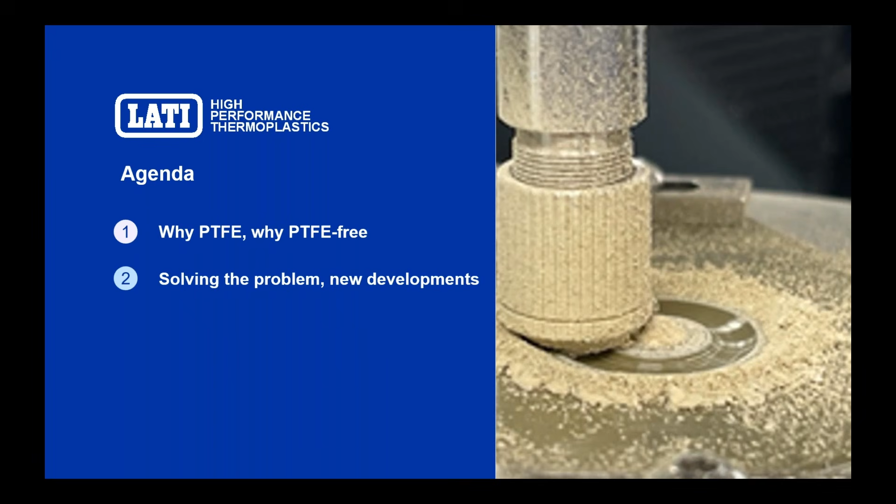So let's first give a look at the agenda. We will start to understand why PTFE is so effective from a tribological point of view in thermoplastic compounds, starting from the chemical structure of PTFE, which is the key under the outstanding performances. Then we will see how it is possible to approach a replacement problem like this one, how it is possible to take reference to select the correct device in order to understand and test the tribological properties. Then for sure we will give a look at the real tests, the real results, and at the end we will make some conclusions and give some tips in order to go on with other tests and explore maybe other solutions.

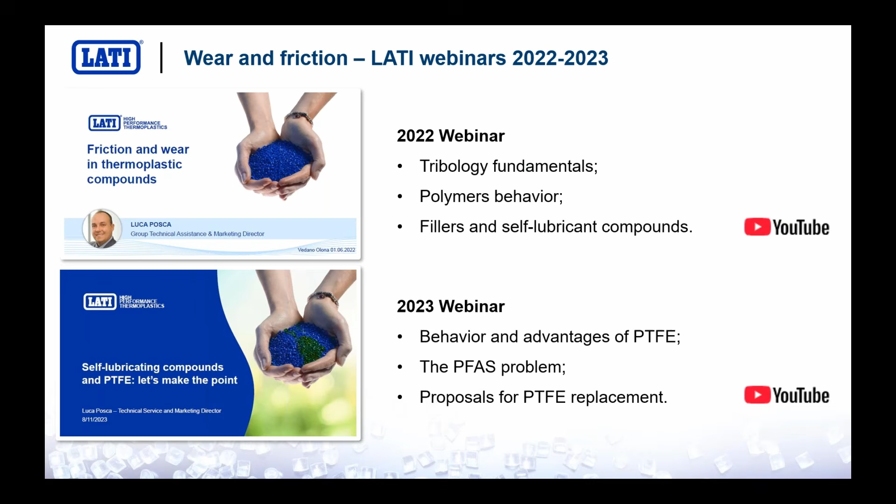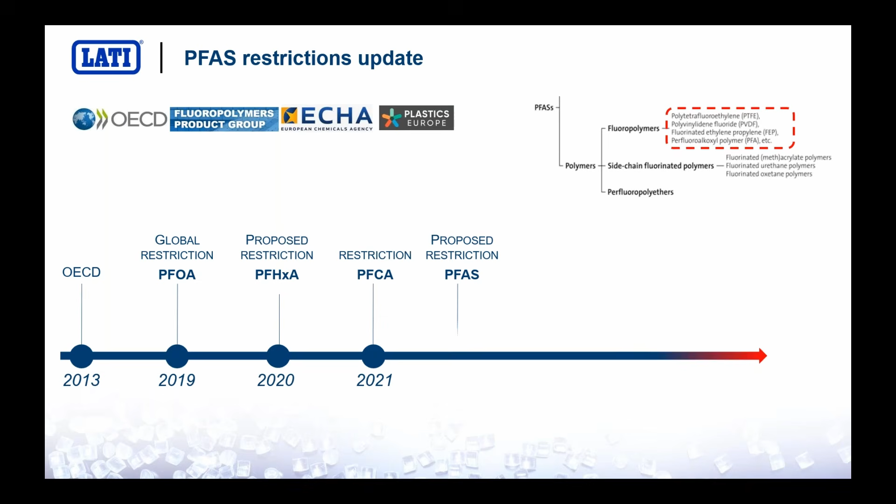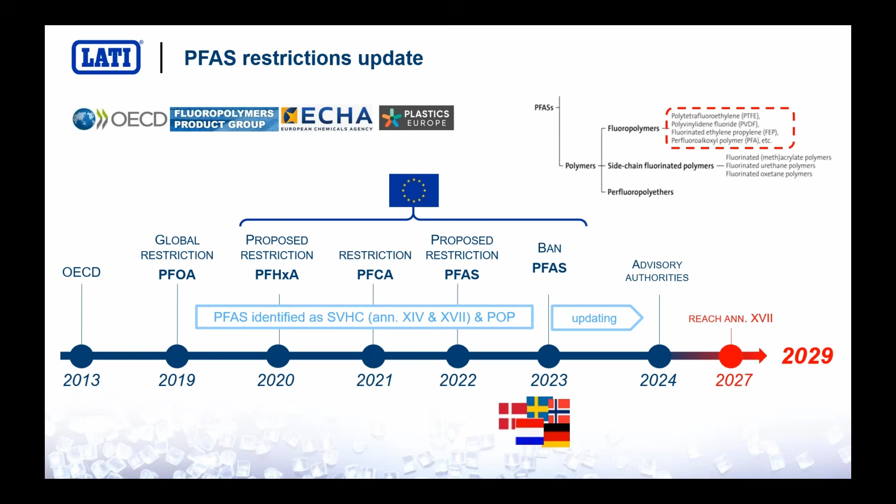As you know, this is the point. The problem is that possible restriction could take place in the next few years due to the fact that all the PFAS substances like PTFE are considered toxic for the human body, but also for the environment. They have a high bio and eco accumulation, and so they are considered dangerous for both the body and the environment. Now the European Commission is making some new evaluation, also thanks to new studies he asked, but also with the help of external entities. Rumors say that probably some restriction can take place, but not before 2029. In any case, we are waiting for an official answer by the European Commission.

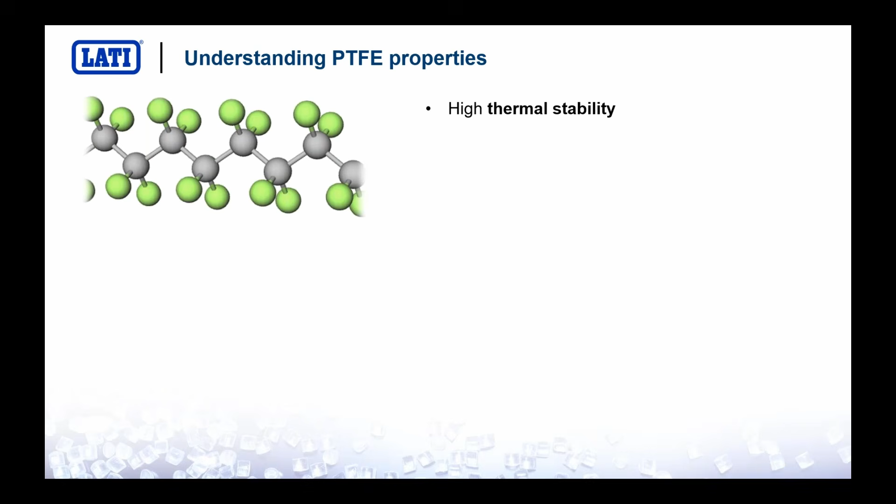Let's give a look, as I've already mentioned, at this outstanding substance, PTFE. What is the secret of PTFE? The secret of PTFE is the chemical structure. The macromolecule of PTFE, the polymeric chains, are really, really long. The molecular weight is really, really high, even if the molecule itself is really simple - only two different elements in the chain, only carbon in the main chain and fluorine in the side groups. The secret is the covalent bond between carbon and fluorine, which is probably one of the strongest bonds available in nature, due to the big difference in terms of electronegativity of these two elements. A very strong bond means that you need a lot of energy to break it. That's the reason why PTFE shows a very, very high thermal stability.

The melting point of PTFE is over 300 degrees. The chemical inertia is also very high - it's very inert and resistant against, for example, strong acids or strong bases, strong oxidants. So it's widely used also alone, not like an additive, but also as a base resin in very aggressive environments. It also exhibits a very low surface energy - it doesn't like to adhere to any other substances, so it's very difficult, for example, to paint it or to glue it. This is very important because due to the fact that it doesn't like to adhere to a counterpart, it shows a very low friction factor in relative movement against another part, for example metal or another plastic part. For the same reason, it exhibits a very high resistance to the adhesive component of wear. On the other hand, the forces between these big chains, the intermolecular forces, are really weak.

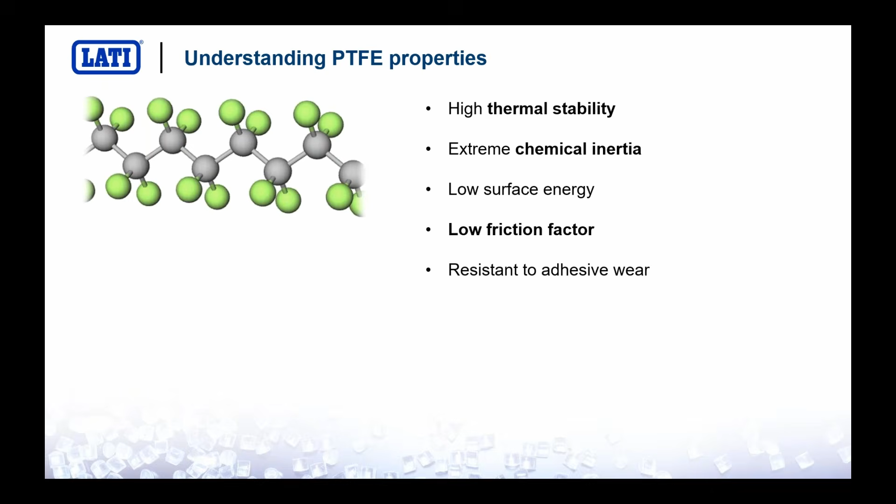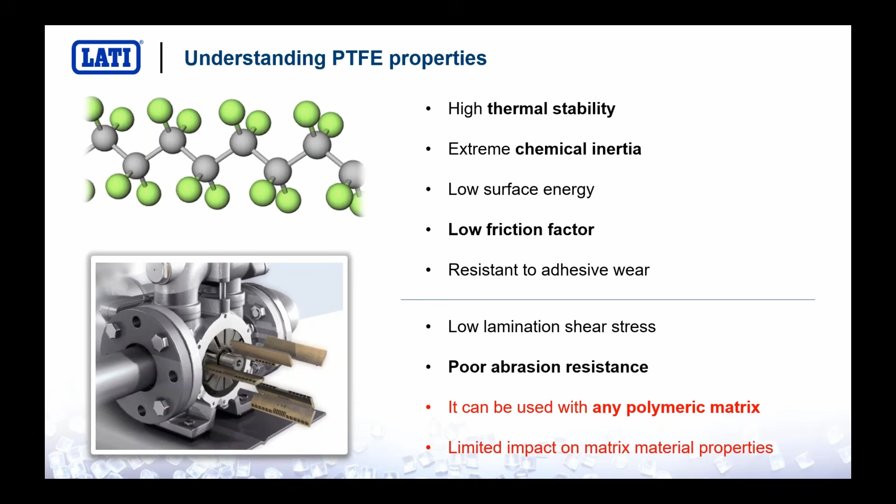There are many solutions to improve it. For example, a solution with the synergistic effect between PTFE and aramid fiber - that's just an example. Other properties include that it can be used with any polymeric matrix, from polypropylene to PEEK, polyamide, PPS, and so on, without compromising a lot the mechanical and also the thermal properties of the main resin.

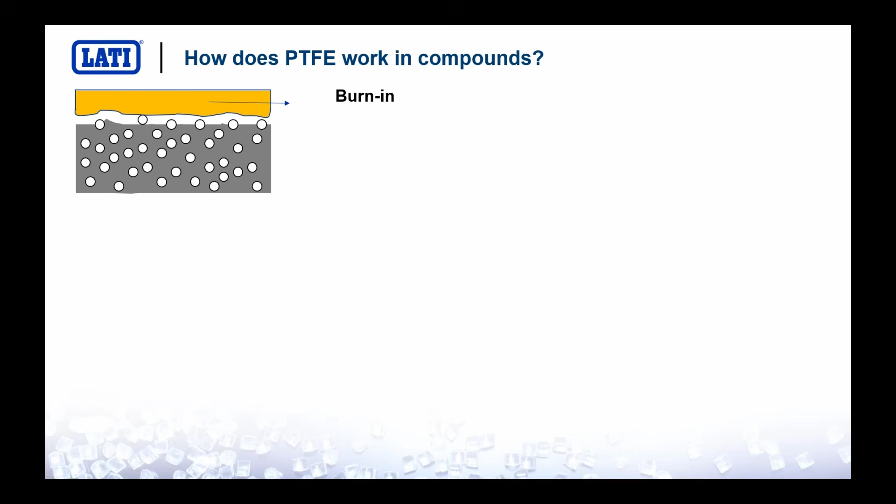But what is the mechanism at the basis of the outstanding tribological performances? Just imagine a compound, a base resin, the gray material, with the PTFE, the white bubbles, dispersed inside the matrix, and the relative movement against a metal, for example the part in orange.

The first step is a burn-in step. So any kind of surfaces are not flat - they have peaks and they have valleys. Through the relative movement of one surface against the other, we have the removal of the surface roughness for sure.

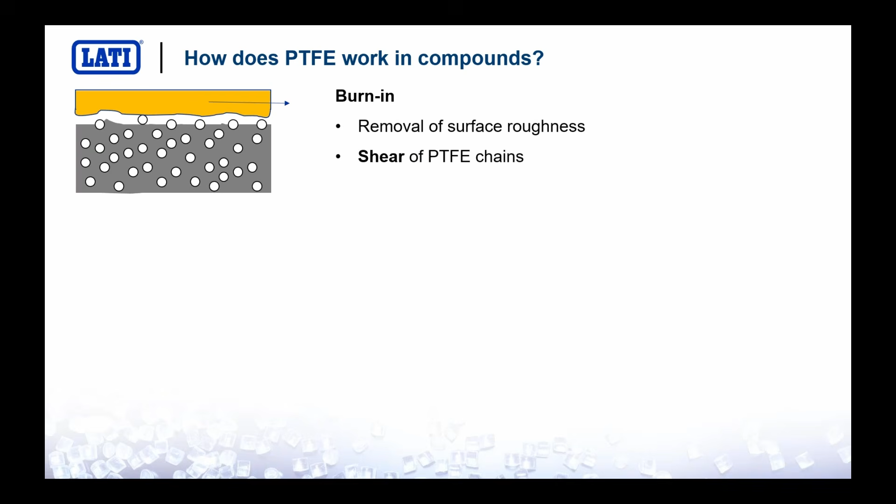Due to the very low intermolecular forces, during this movement, it's very easy to shear the PTFE chains, which fill the roughness, the valleys of this kind of surface. Let's make a zoom on one of these valleys filled by PTFE, and you can see there are the white bubbles with PTFE inside.

The second step is the breakage of these very long PTFE molecules into several smaller molecules, smaller chains. So the chain breakage, which leads to the formation of very, very reactive molecules, very reactive radicals.

These radicals are then transferred onto the counterpart, so there is a film transmission to the counterpart. At the end, we will have PTFE on one, but also on the other surfaces of both materials. So we have PTFE sliding against PTFE.

PTFE works in a very good way, above all for high load and with low speed. And the typical percentage we normally have PTFE in the compounds goes from 5 to 20%.

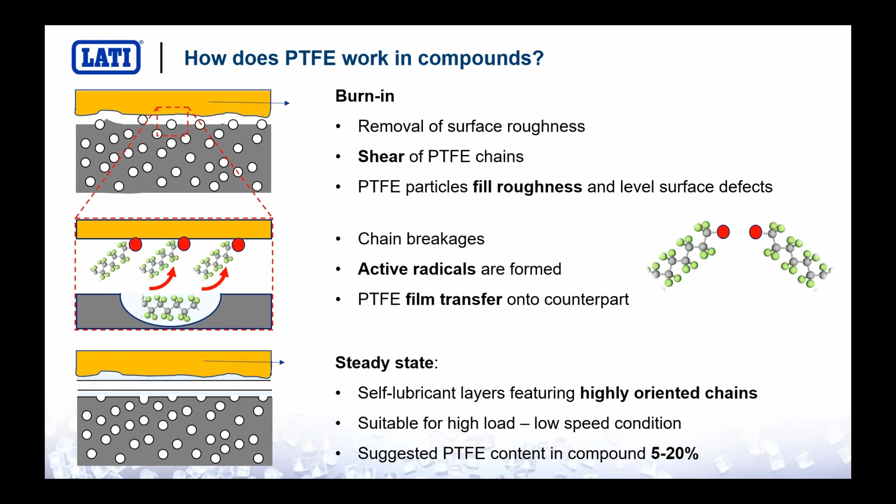So the secret is this film transmission that we try to obtain also with other polymers, as we can see in the next few slides, to take advantage from it.

So to be a good alternative of PTFE, what are the main requirements? For sure, high chemical inertia, in order to not lower the chemical inertia of the base polymer. Thermal stability, for sure. Good processability, because it's important to guarantee a good process, a good moldability of the final compounds with good viscoelastic properties. Not compromise too much the mechanical properties, for sure, at the end, but probably the most important thing, with an eye to the price.

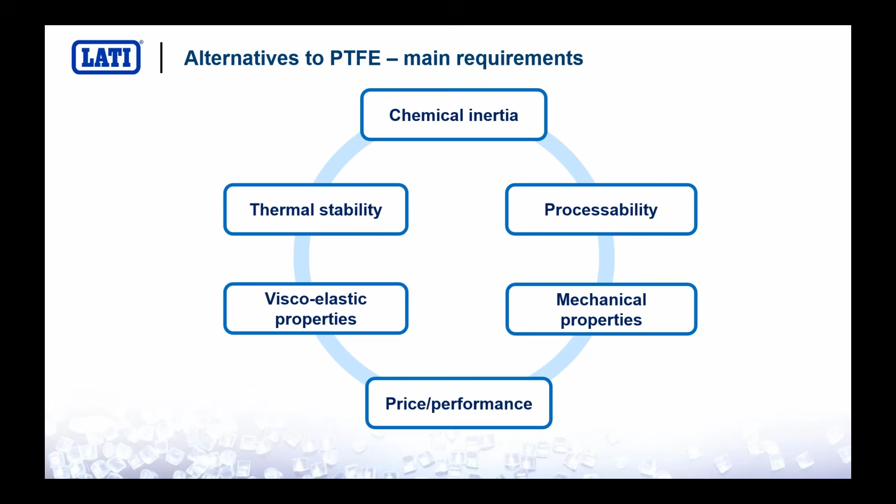As we already know, one possible solution already used in the market is a polyolefin, a very strange polyolefin - the name is ultra-high molecular weight polyethylene. So it is a high molecular weight polyethylene, a polyolefin. This is the chemical structure. Also in this case, the molecular weight is really high, like also the crystallinity, but the molecule itself is really simple, only 2 elements in the polymeric chain.

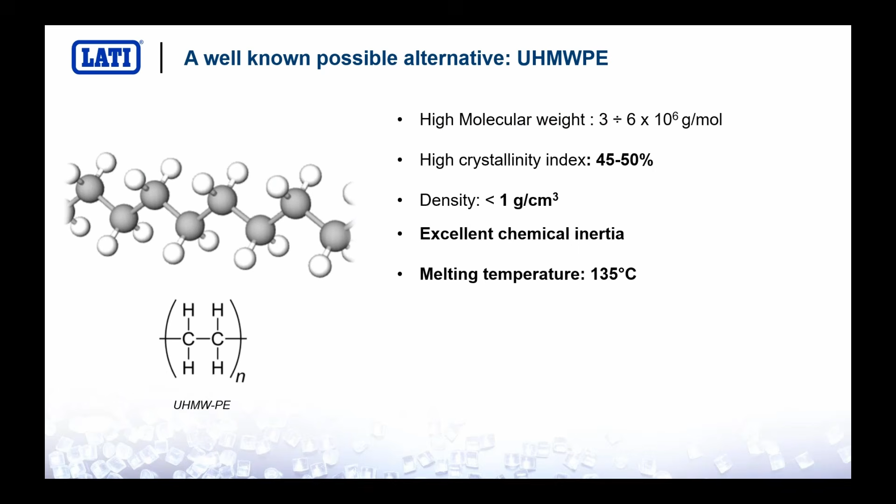The density is lower compared to PTFE, which is higher than 2. In this case it's lower than 1, so very low compared to PTFE, with an excellent chemical inertia, like all the polyolefins, polypropylene, polyethylene, and so on. A low melting temperature, around 135 degrees, so 200 degrees lower than PTFE. But another advantage is also the GWP, the carbon dioxide emission to produce 1 kilogram equivalent of the product, which is really lower compared to PTFE.

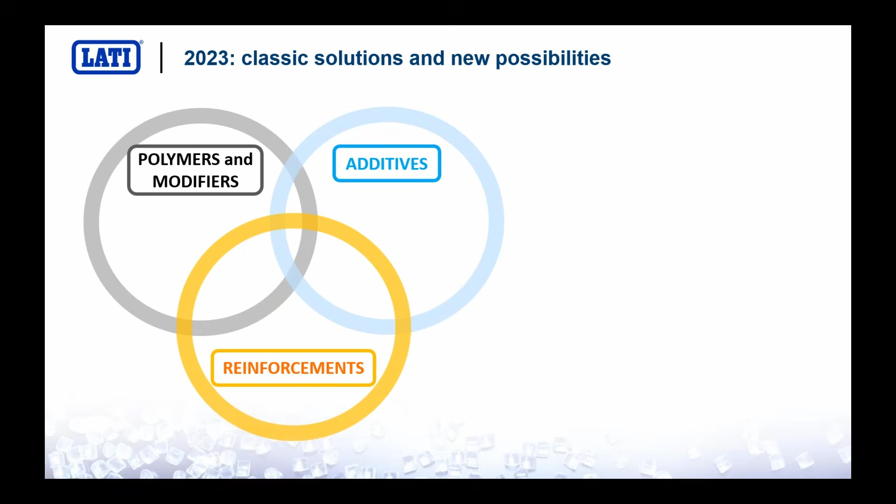Up to now, what we have already done, and also our competitors did, is analyze the tribological behavior of the base polymers with some modifiers, elastomers, and so on, with the existing self-lubricant additives in the market. And also we know the behavior adding some reinforcement, some fillers or fibers like glass fibers and also carbon fibers.

We know very well also the synergic effect of different self-lubricant additives available in the market, like silicone oil, aramid fiber, molybdenum bisulfide, graphite. But for one reason or another, they cannot be considered equivalent to PTFE, because they can work with some boundary conditions, but not in any kind of condition like the PTFE applications.

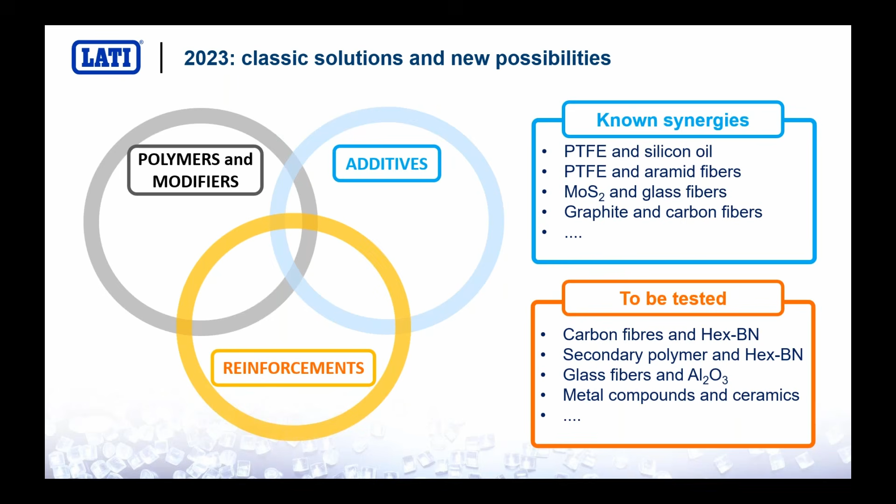So what we need to do is explore something else - try to find other additives, try to find some mineral fillers to add to replace PTFE, but also explore the synergist world. And that's what we did.

We performed this job thanks also to Politecnico of Milan, a university based in Milan. This study is also a thesis of a student who graduated two weeks ago. This collaboration gives us also the opportunity to have access to many topics in the literature, many books and so on. It was a very good collaboration which helps each other.

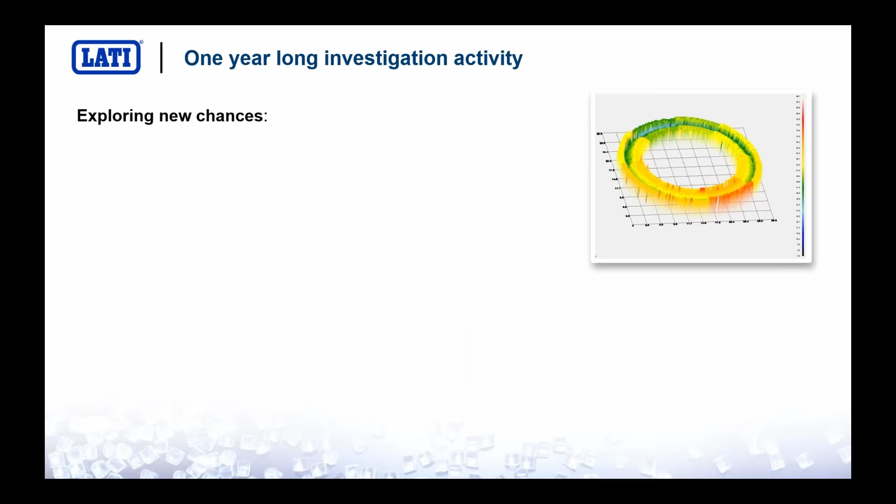So let's make the point in order to understand how is it possible to approach this kind of problem. First, we performed literature studies, thanks to the university and to the help of our suppliers, in order to find some suitable or possible candidates like main fillers, but also synergists.

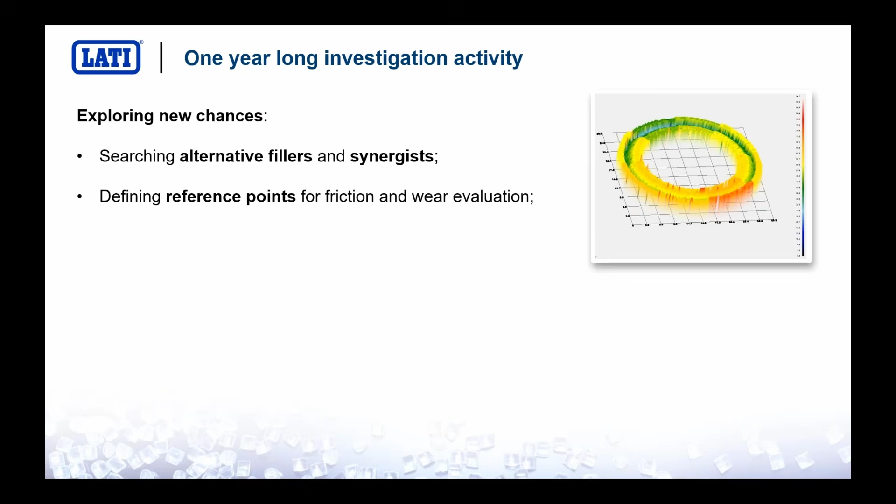Then we had to define some reference points to evaluate friction and wear, so some materials which are the reference to start. Then we had to define, and it lasted a lot of time, the most suitable conditions. As you can see in the next few slides, there are many conditions and parameters possible to set in a tribological device to define the most suitable method to detect the wear resistance, the wear factor, but also the friction coefficient.

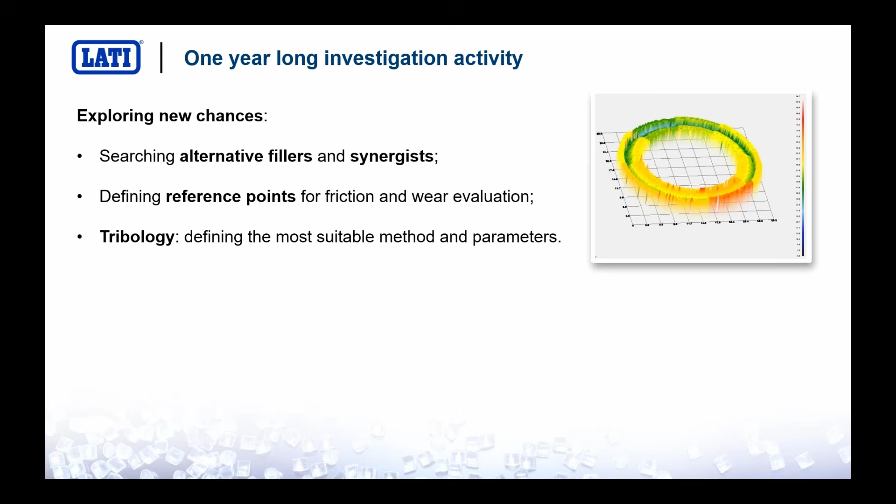At the end of these studies, we had to analyze all the other properties of the compounds that we produced: mechanical, thermal properties, and also the processability and the reliability. It means the industrialization of this kind of material, in order to understand if it's possible also to push them.

With an eye, as already mentioned, on the price and the marketability of this new proposal.

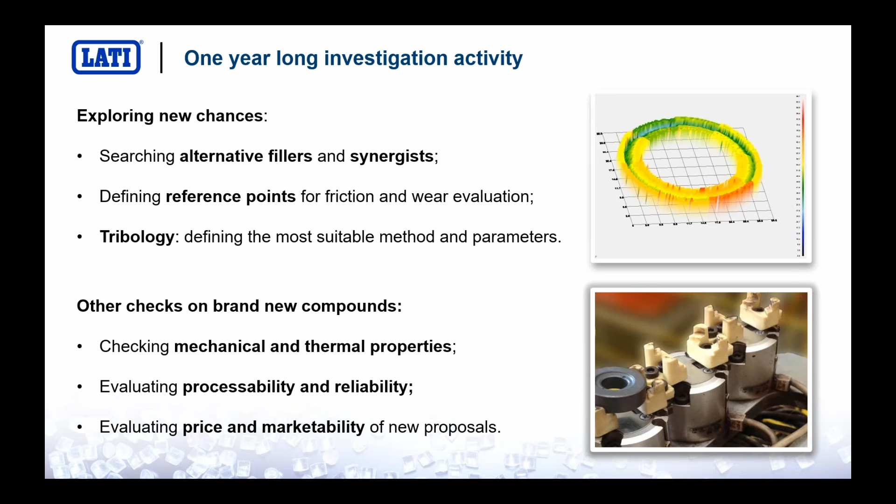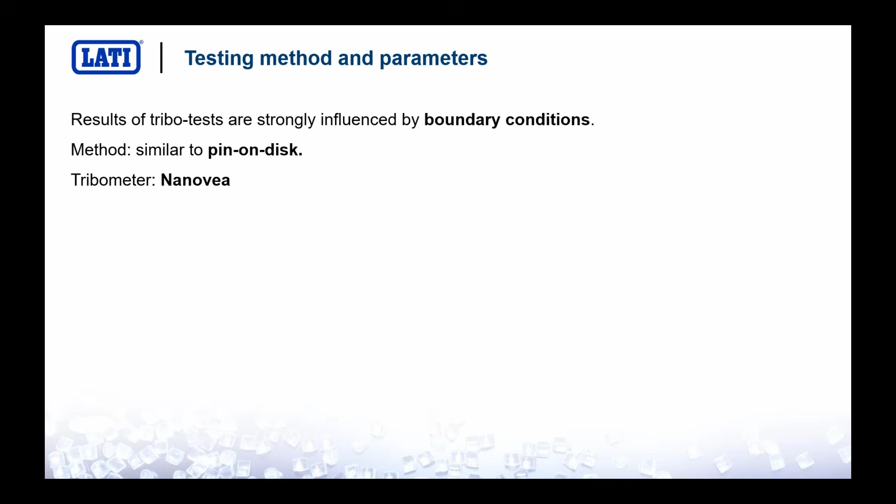So for what concerns the test, there are many kinds of devices available in the market to measure the wear resistance, but also the friction coefficient of polymers. We selected a pin-on-disc method. The tribometer is made by Nanovea, and the pin is made in stainless steel, while the disc is made of plastics, the compounds that we want to analyze, and is put in rotation against the pin.

As you can see in this slide, there are many parameters that we can calibrate, but the most important ones are the rotational speed, 100 RPM, and also the load, which is 10 Newton. It's also important to notice that we put blown air on the wear site in order to remove all the particles that were created during the test.

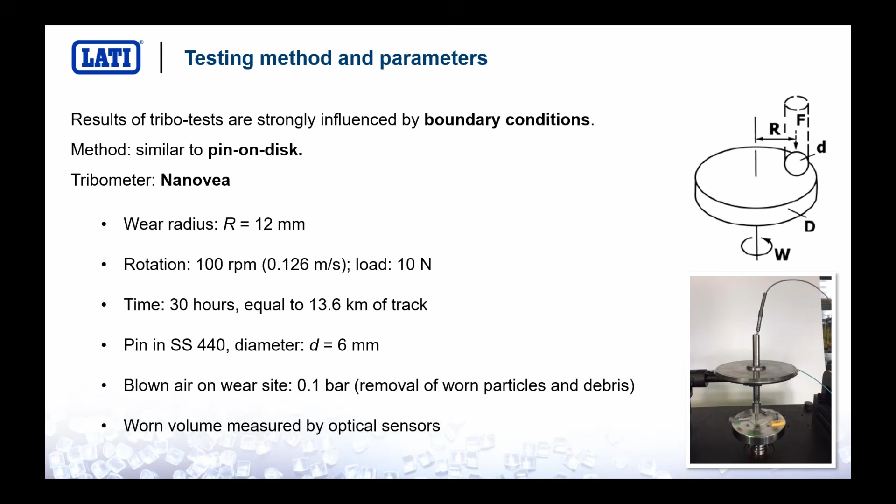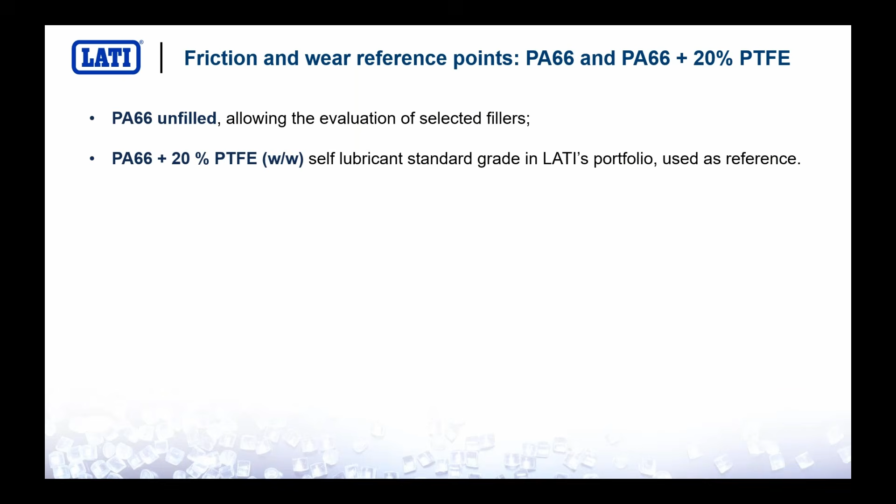For what concerns the reference, we started with a material that for LATI is a standard material, the polyamide 66. So we started to evaluate the performances of an unfilled polyamide 66 in order to fix a reference. And then for sure we selected also a polyamide 66 plus 20% of PTFE, because the aim of this study was to replace it with other candidates. So we used these two materials as reference.

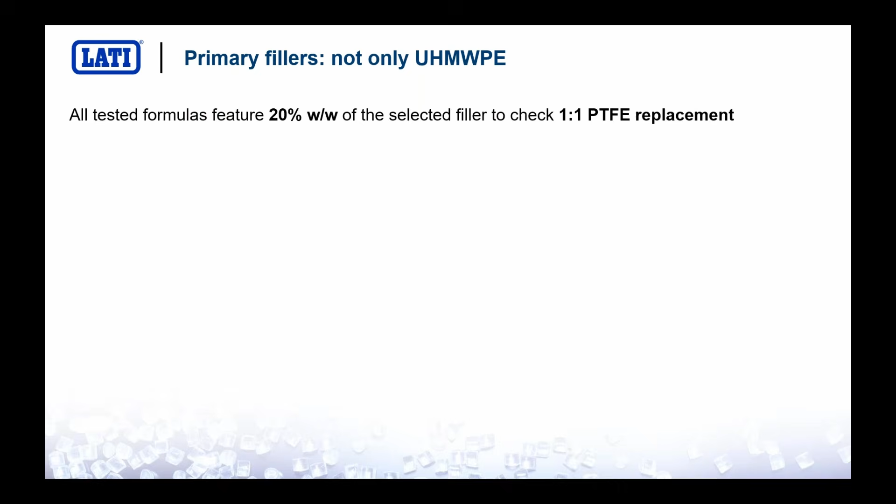And then for sure, we didn't test only ultra-high molecular weight polyethylene, but we tested a lot of other additives as main filler. We tested many different ultra-high molecular weight polyethylenes, because there are a lot available in the market, and they are all different, for example in granulometry, molecular weight distribution, or viscosity, and each one behaves in a different way. So it was really important to analyze the performances of all of them.

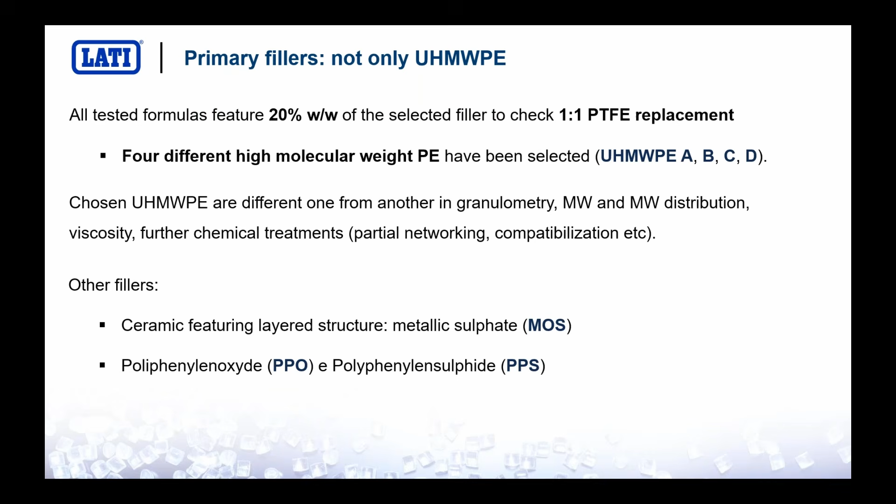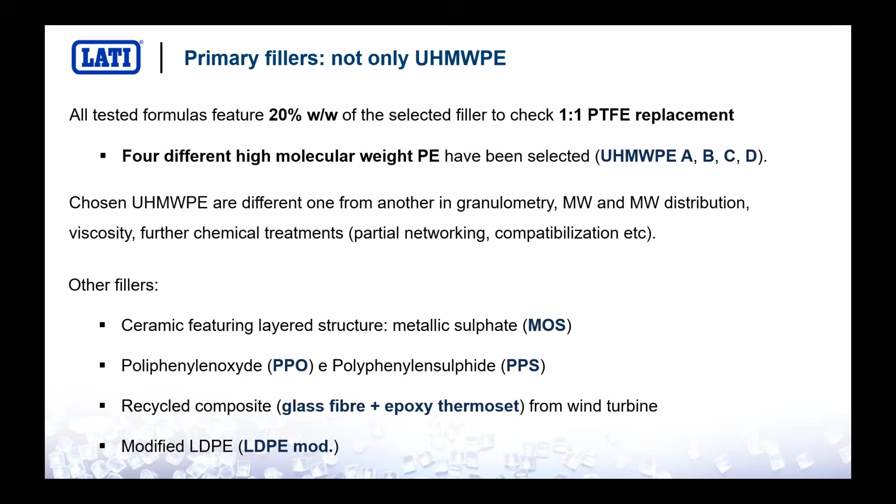Then for sure we tested many others. For example, we tested ceramic layered structures like metallic sulfate. We tried some polymers in order to take advantage of a possible film transmission, like what happened in the case of PTFE. We also tested recycled composite from a wind turbine, so glass fiber plus thermoset, and also a modified version of LDPE.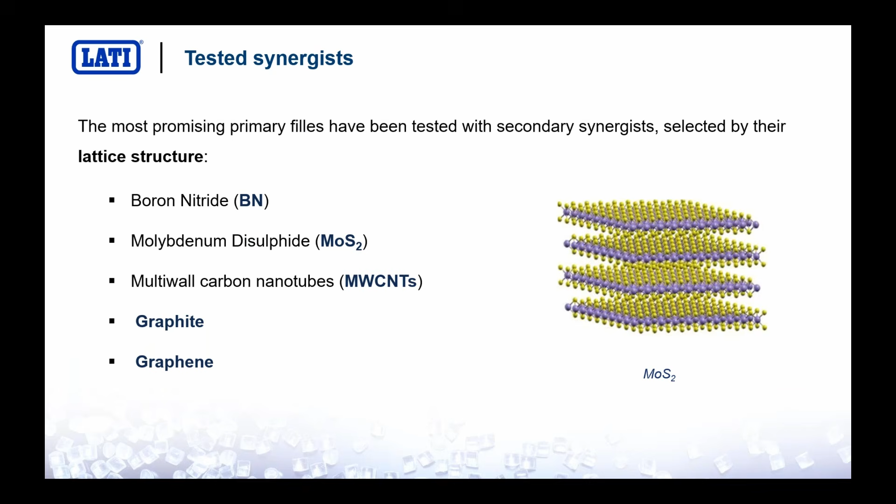Then we had a look also on the synergist. In this case too, we tried to find something that from the literature can work as synergist with a main filler. For example, a lot of lattice structure materials like ceramics, boron nitride or molybdenum disulfide, but also some carbon-based materials like carbon nanotubes, which should help improve the nucleation and so the hardness of the surface of polyamides and other semi-crystalline materials, and also graphite and graphene.

So let's give a look at the results. Not all the tests we performed are here because there were a lot, but we try to summarize the best, the most meaningful results that we obtained. So let's start from a reference.

This is the typical plot of a tribological test. On the y-axis we have the friction coefficient, which is monitored during the distance traveled during the test. On the x-axis we have more or less the duration of the test expressed in meters.

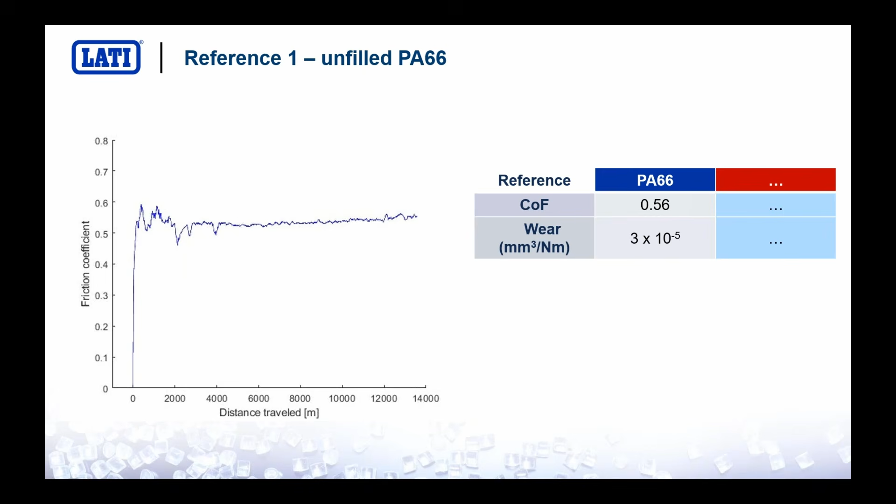What is possible to achieve from this plot is for sure the friction coefficient, which for polyamide 66 is more or less 0.56. It's also possible with the device we used to detect the wear resistance, expressed in cubic millimeters over Newton meter. As you can see, after a first peak, the friction coefficient of polyamide 66 tends to a plateau.

Polyamide 66 is not one of the worst materials in terms of tribological properties because it exhibits a very high crystallinity, and this is very helpful for the tribological properties.

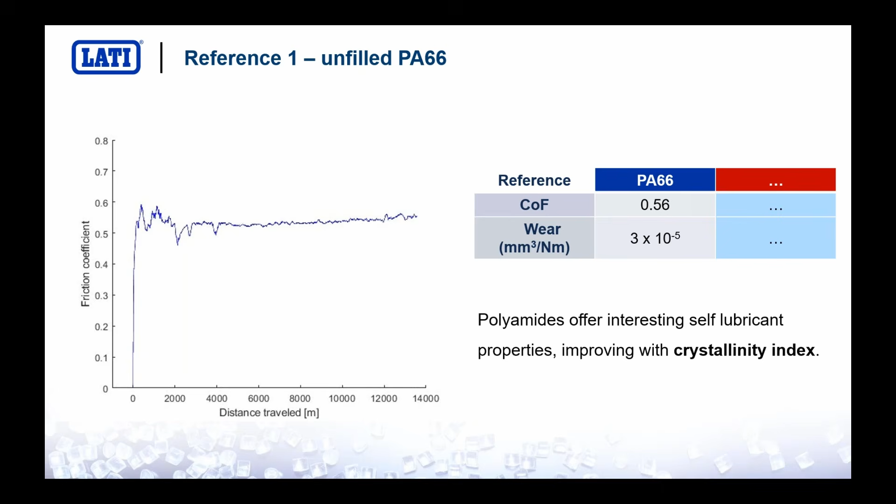So this is the first reference, but the second reference was for sure polyamide 66 plus PTFE, our main reference, the goal to get closer to. As you can see on the right table, but also on the curve, the friction coefficient is more or less half of the polyamide 66, and also the wear factor is one magnitude order lower than the polyamide 66. So we had a dramatic improvement of both wear and friction.

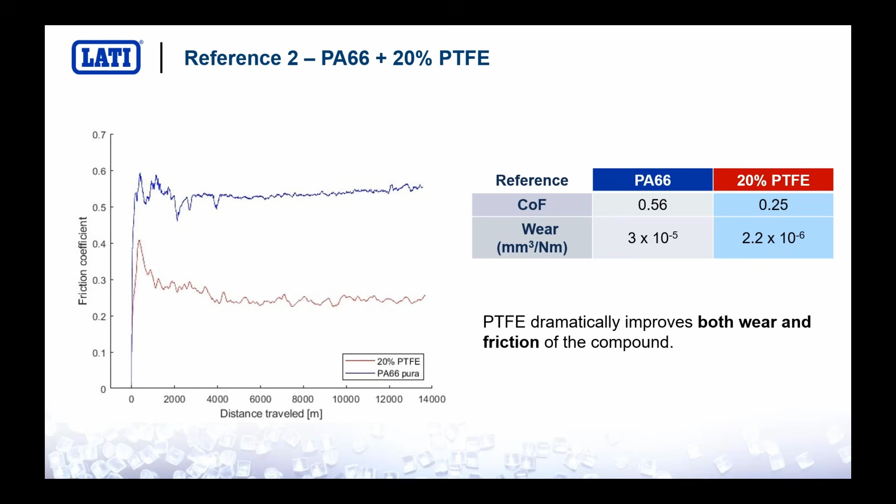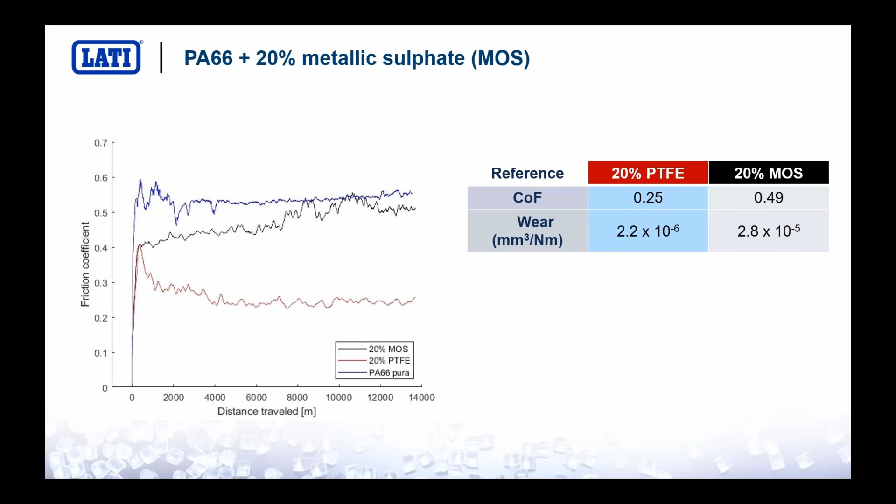Let's start to see what we tested, for example with some metallic sulfate that we analyzed. As we can see, the tested material is always in black. For the metallic sulfate, we faced only a small improvement in the friction coefficient, from 0.56 to 0.49, but almost no effect on wear.

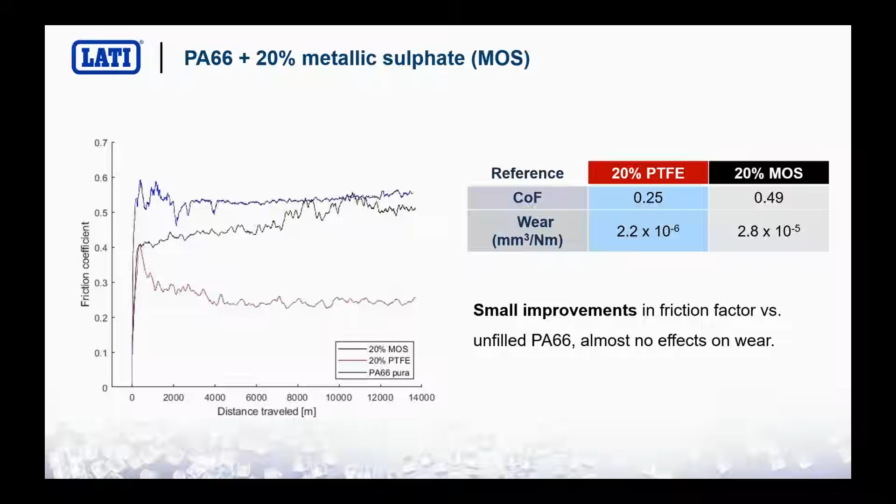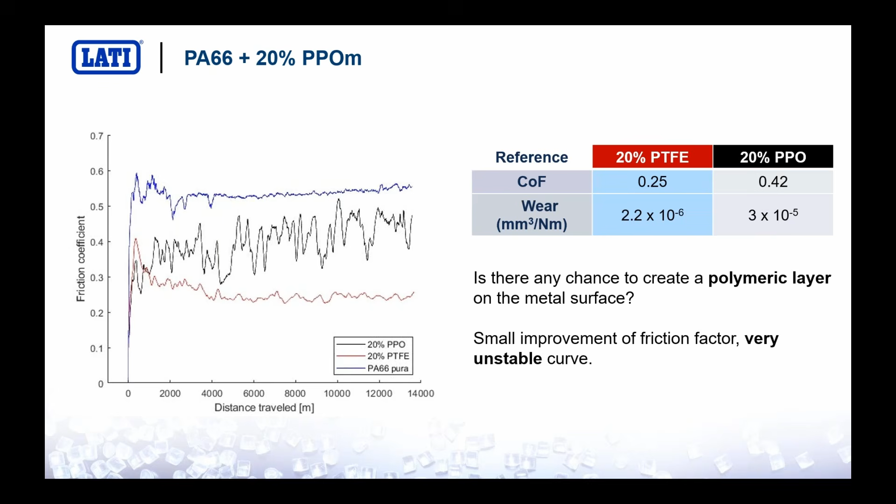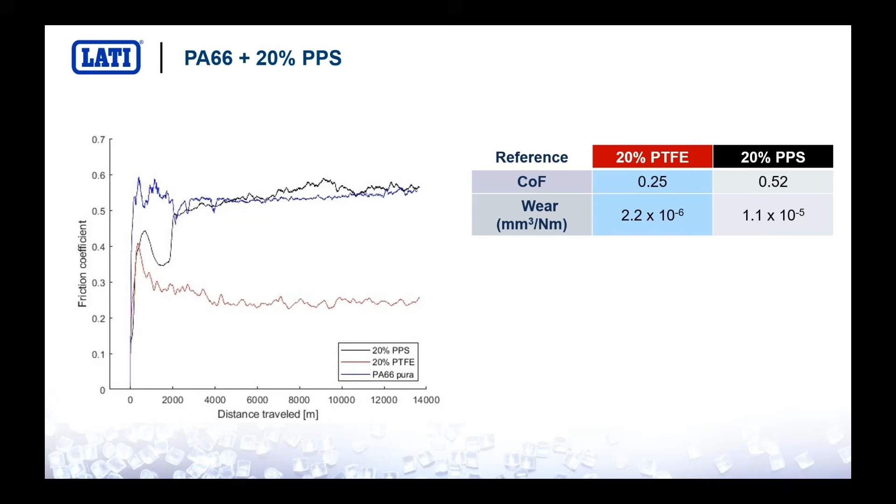We tested also PPS because in literature we found some interesting results about the use of PPS as a self-lubricant additive in some particular compounds. But again, we didn't see any improvement in the friction coefficient. From a wear factor point of view, we obtained slightly better results, 1.1 per 10 to -5, a little better than unfilled polyamide 66, but far from the PTFE performance.

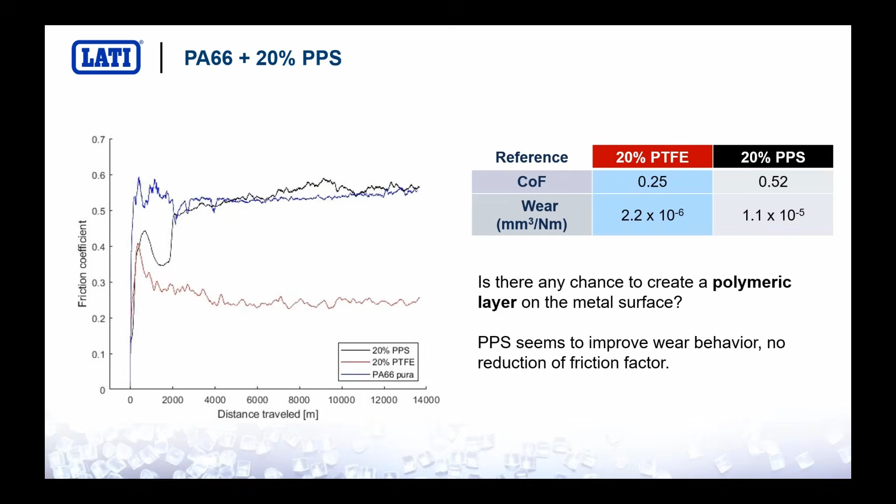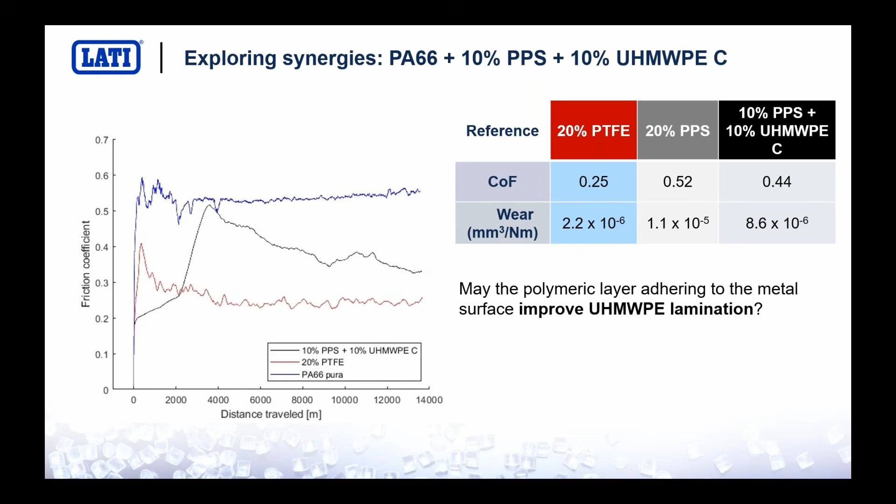Then we started to analyze some synergistic effects, for example between PPS and ultra-high molecular weight polyethylene. The aim was to help this kind of lamination of ultra-high molecular weight polyethylene, like what happened for PTFE, in order to favor the film transmission. Small improvements were detected on both wear and friction factor, above all compared to the version with only PPS, slightly better in both properties.

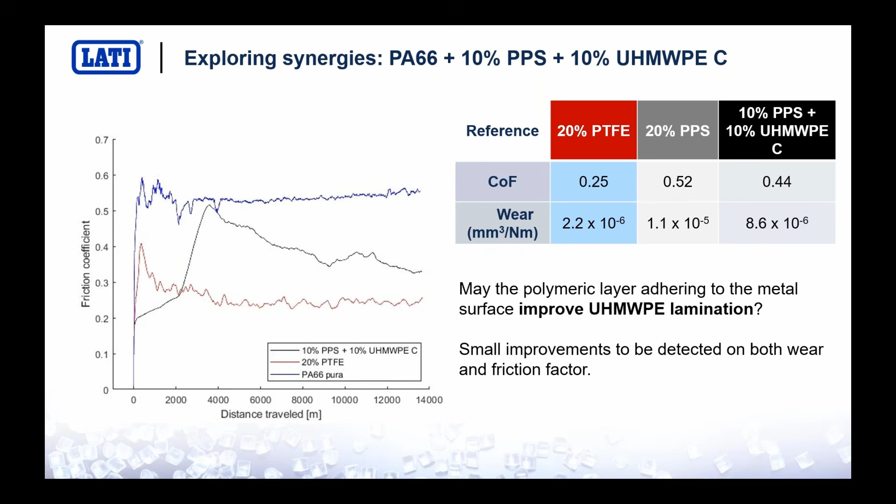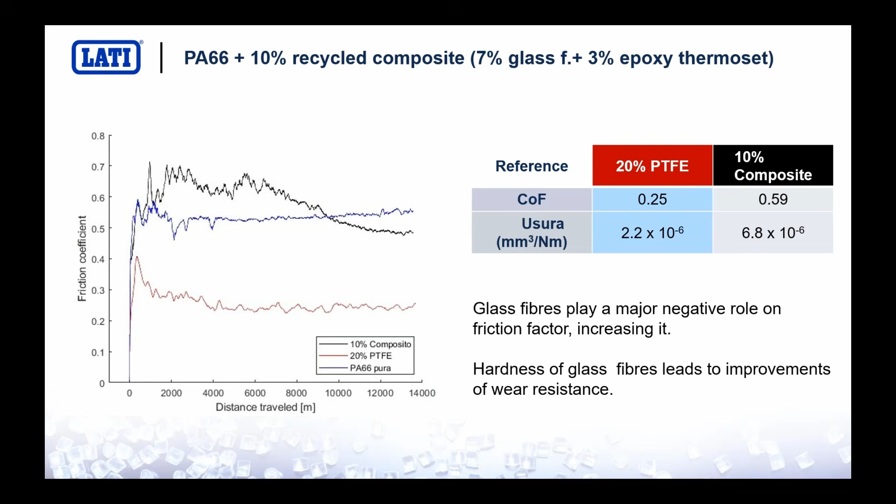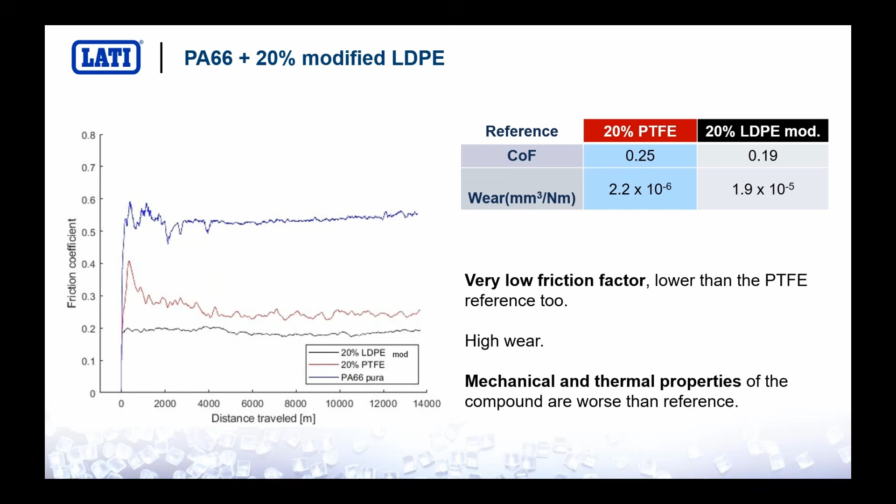One drawback of these compounds, as you can imagine, is that you introduce 20% of a polyolefin, a low melting point resin, so the thermal properties, but also the mechanical properties, are really worse than the reference. That's the main reason why this kind of solution cannot be proposed to replace one-to-one a polyamide 66 plus PTFE.

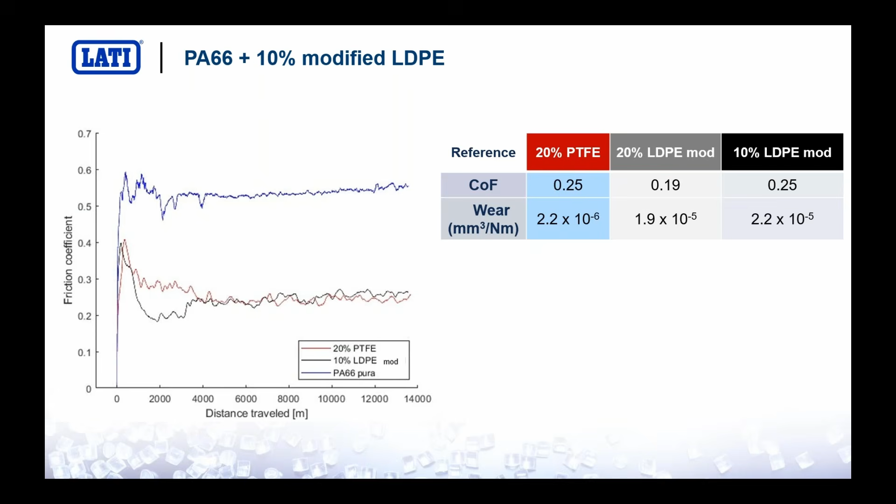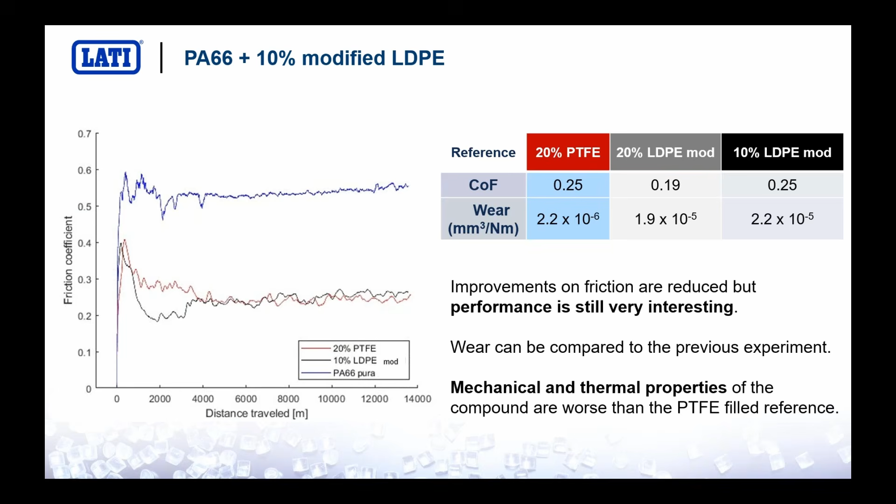So we tried also to halve the percentage of LDPE in order to check the tribological behavior, and we obtained very good results in terms of friction coefficient, more or less comparable, from a curve point of view, with PTFE, while the wear remained too high. But also in this case, with 10% LDPE, the mechanical and thermal properties of this kind of compound are really low compared to polyamide 66 plus PTFE.

Then we started to analyze the well-known additive used in the market, the ultra-high molecular weight polyethylene, type C, which stands for the entry level, the cheaper version. As you can see, we didn't obtain any positive results in this case - no improvement from both friction and wear resistance.

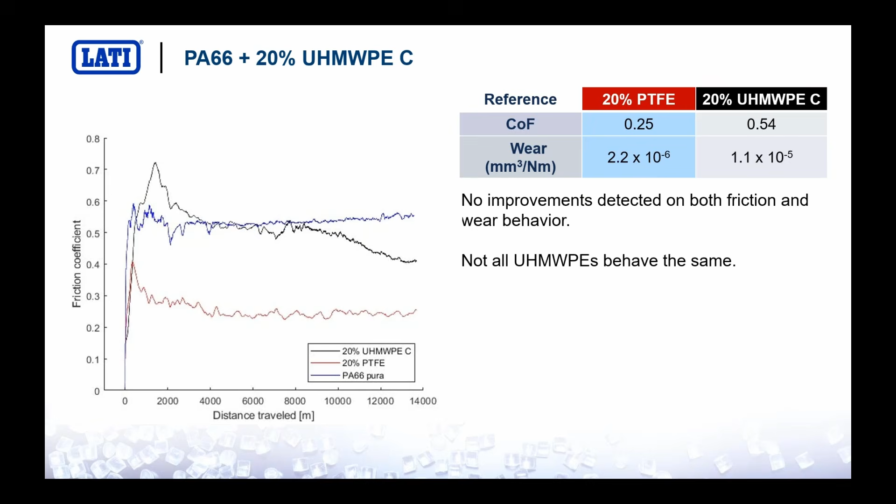Fortunately, not all ultra-high molecular weight polyethylene behave the same way, as we'll see in the next few slides. But this slide is important to remember the synergic effect we've already discussed - taking advantage of both PPS and ultra-high molecular weight polyethylene C-type, we obtain better results than using the single additives. The synergic effect was confirmed by the friction coefficient, which was much lower compared to the two materials with only PPS or only ultra-high molecular weight polyethylene.

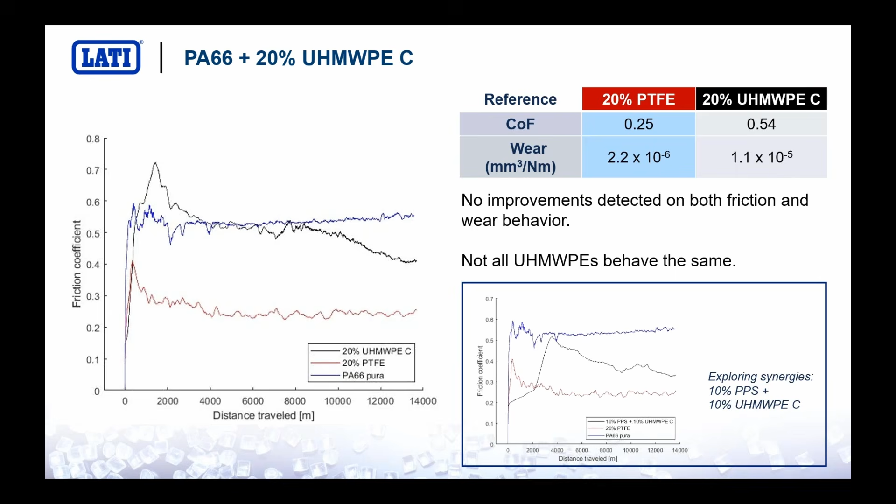Let's move on to another synergic effect we analyzed: ultra-high molecular weight polyethylene at 5% with 1.5% of multi-wall carbon nanotubes, normally used for electrical conductivity, but in this case also to improve the nucleation power, hardness and wear resistance. Unfortunately, we obtained only very small improvements on the wear rate, with no advantages from a friction point of view, which remained more or less the same as polyamide 66 unfilled.

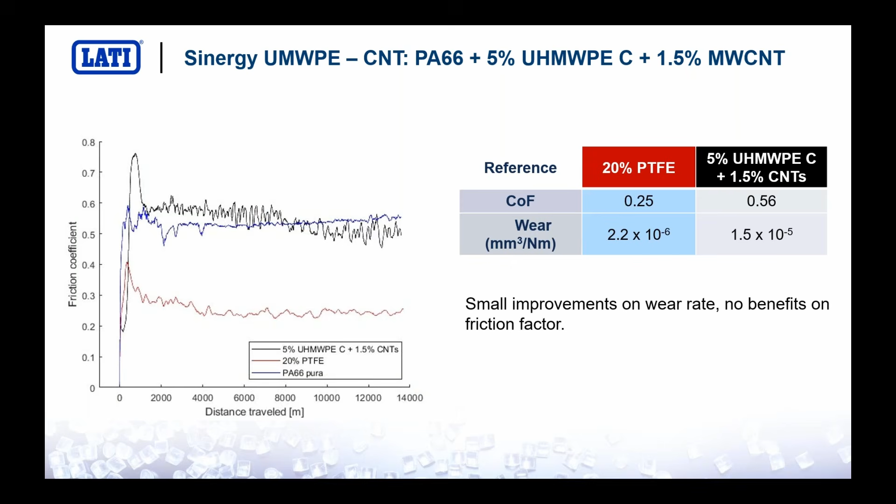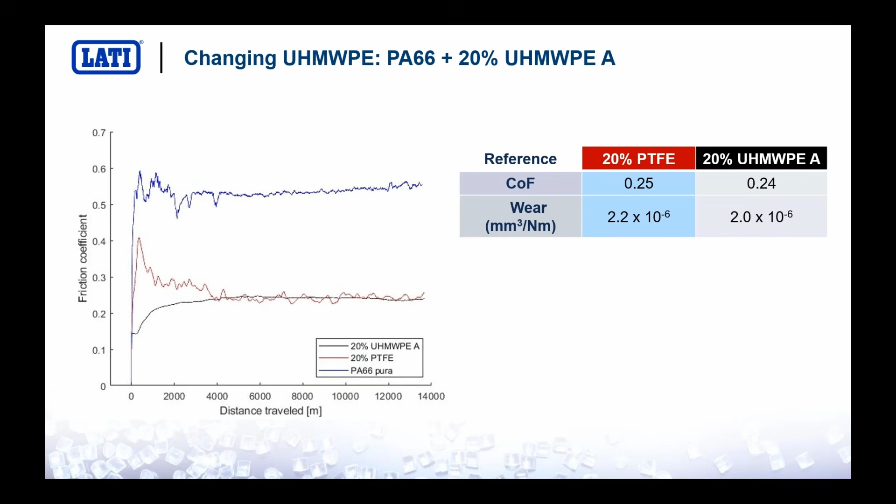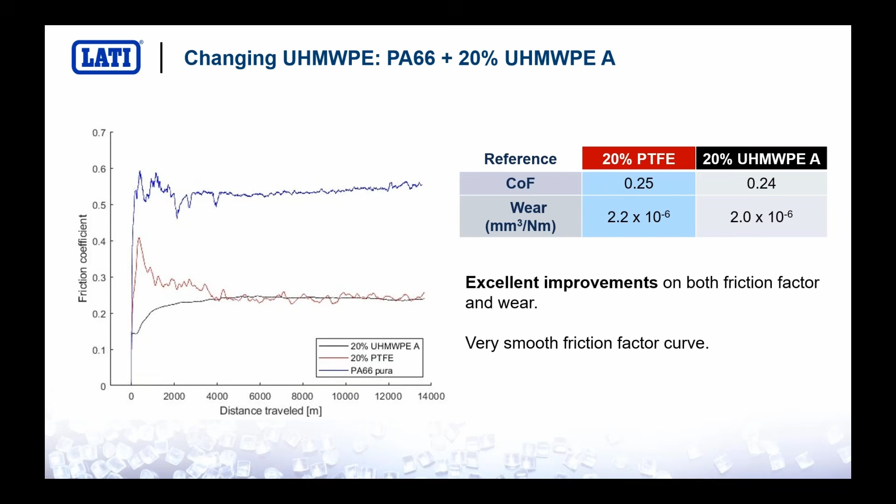Now let's look at a very good result - the use of another kind of ultra-high molecular weight polyethylene optimized for tribological properties. As you can see, we obtained very good results here, the same values in terms of friction coefficient and wear resistance as PTFE. And as you can see on the curve, it's very flat, very smooth, compared also to PTFE. This is a very interesting result.

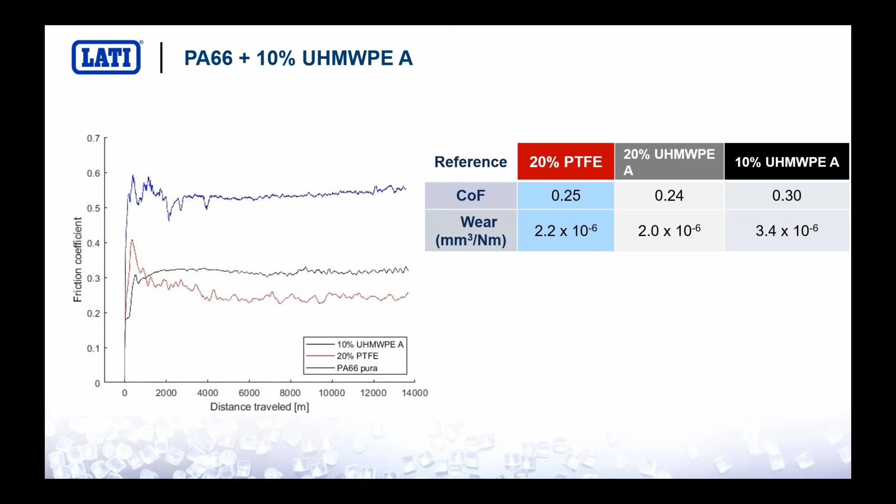Then we tried to halve the percentage to 10% of ultra-high molecular weight polyethylene, because being a polyolefin, it reduces the thermal properties of the base resin. So we tried halving it to check if we could still reach good results with 10%, and the answer was yes - the friction coefficient was still quite low at 0.3, and the wear factor remained at a very good level. So this compound is also very interesting.

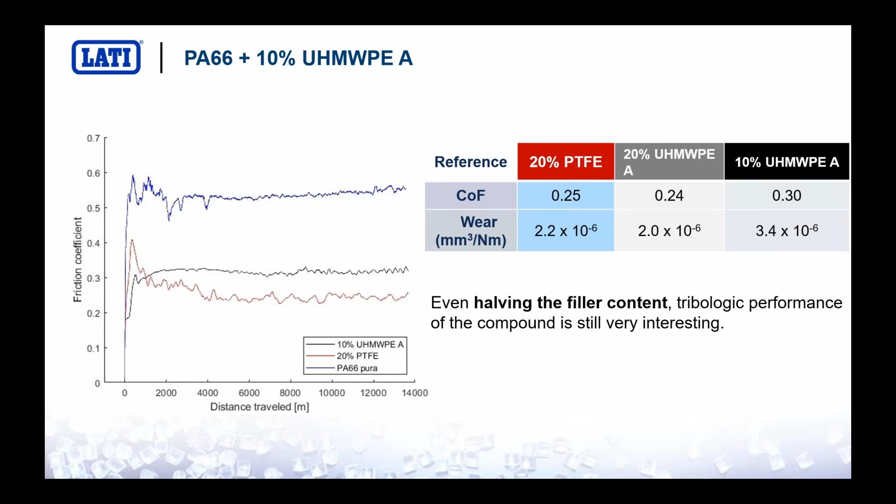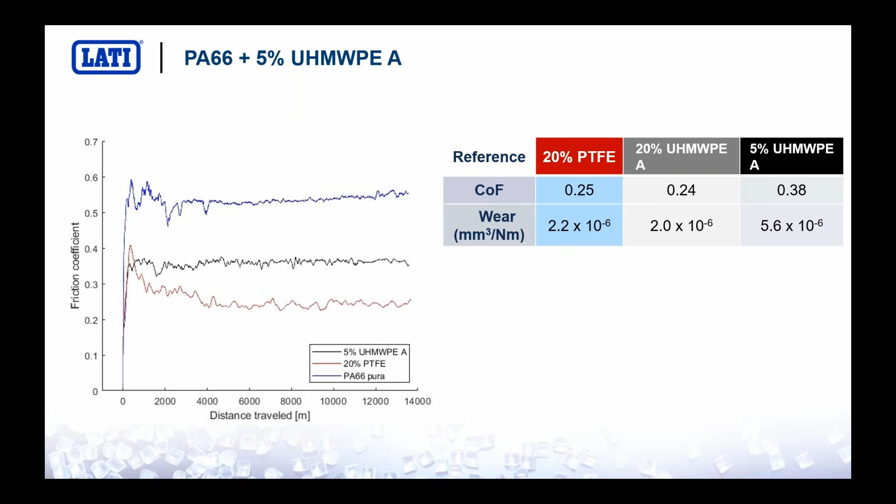We tried halving it again down to 5%, and as you can see, we faced a friction coefficient value higher than the first two trials, and the same for the wear factor. But for sure, even with 5% of this kind of polyethylene, we obtain an improvement compared to polyamide 66 unfilled.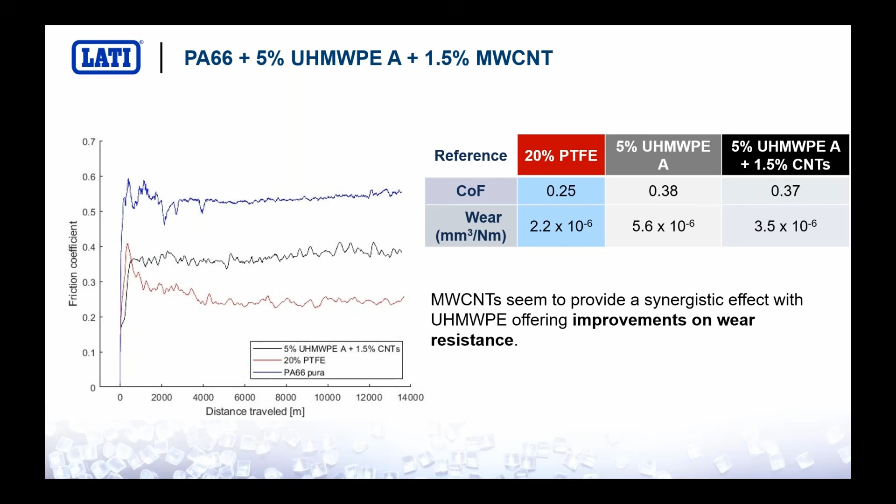Now let's look at the synergic effect between ultra-high molecular weight polyethylene type A and 1.5% carbon nanotubes. As you can see, there's no effect on the friction coefficient, which remains more or less the same as the version with only ultra-high molecular weight polyethylene. But from a wear point of view, we faced a small improvement, which was good. So this is another possible candidate.

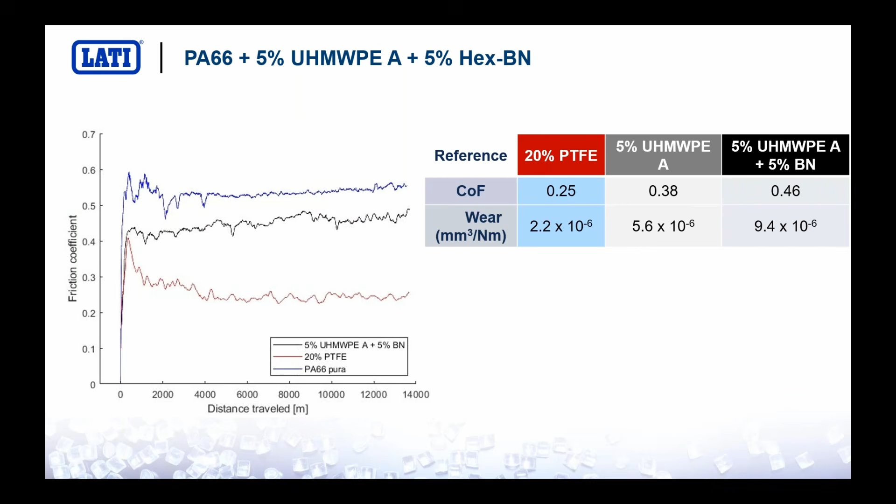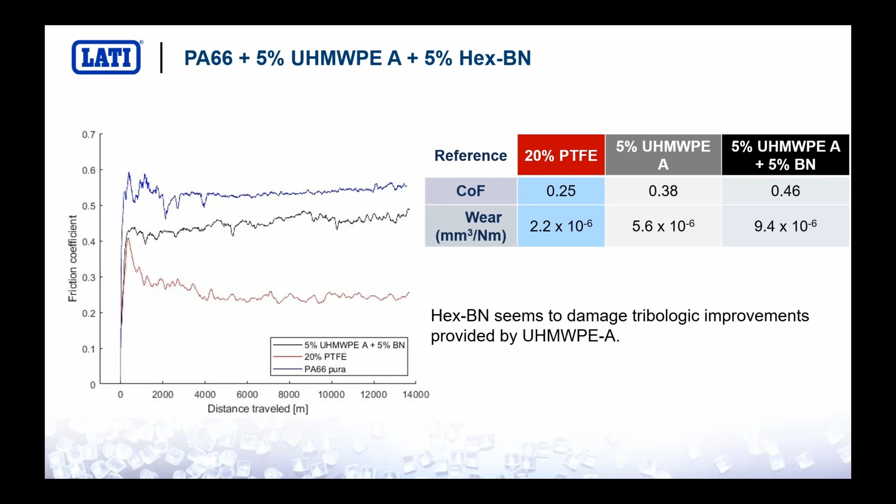But not all synergists work - for example, we repeated the same experiment as the slide before, but changed the carbon nanotubes for boron nitride. In this case, the boron nitride seems to damage the tribological improvement provided by the polyethylene, resulting in a higher friction coefficient and also a higher wear factor. So this was a bad result.

So these, in our opinion, are the best candidates, shown in the second and third columns. The first, in the second column, was the material with 10% type A ultra-high molecular weight polyethylene. The other is 5% ultra-high molecular weight polyethylene plus carbon nanotubes to improve wear resistance. But we've already tested these materials from other points of view - we measured all the other properties, and there are some differences compared to polyamide 66 plus PTFE. First, in the case of polyethylene plus carbon nanotubes, the material is more brittle, so we have lower unnotched Charpy, but also lower elongation at yield, meaning lower impact properties.

And as already mentioned, for the compound with 10% ultra-high molecular weight polyethylene, we face lower thermal properties - more or less 20 degrees lower for the Vicat softening point and also the heat deflection temperature at 0.45 megapascals. So for sure, we obtained very good results in terms of tribological properties, but we need to take care of all the properties at 360 degrees, and in this case we have to face these lower thermal properties.

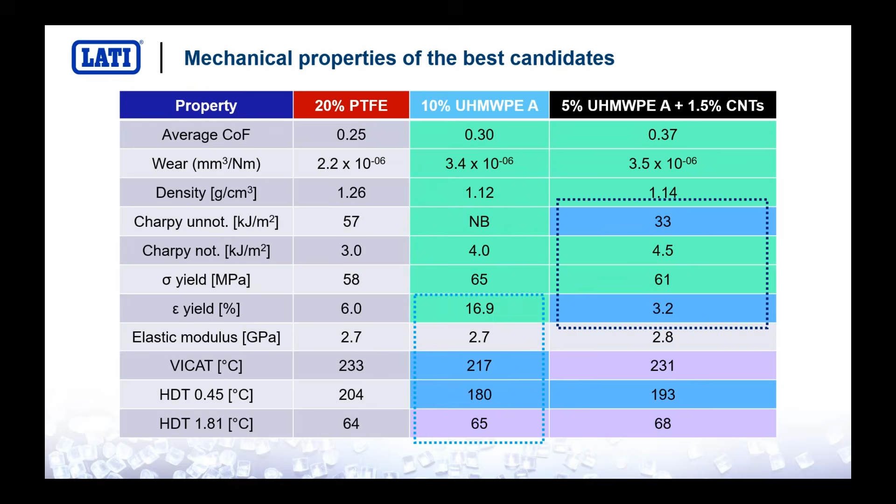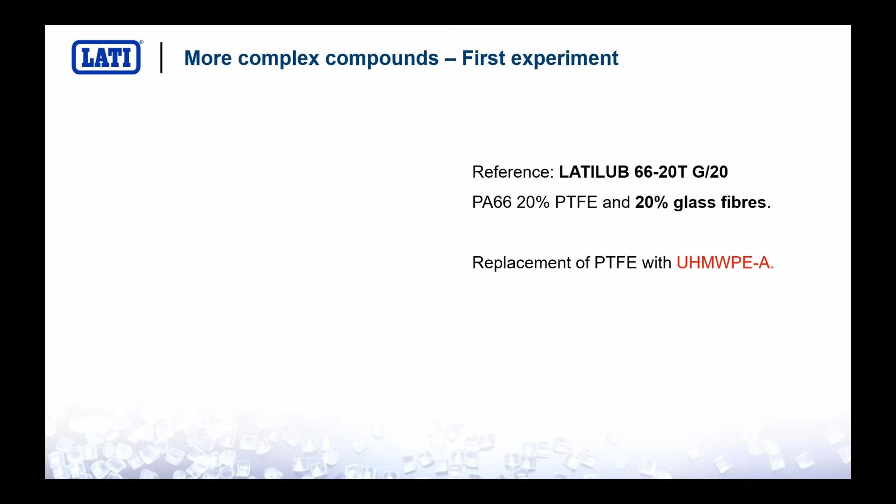We performed extra tests to see if the same additives that work well for polyamide 66 plus PTFE can also work with another material, for example glass fiber. Our material, LATILUB 66-20T G/20, is polyamide 66 plus 20% PTFE and 20% glass fiber. We tried to replace all the PTFE with ultra-high molecular weight polyethylene type A. As you can see in this plot, after a starting running-in step, the average friction coefficient is comparable to the material with PTFE, the black curve.

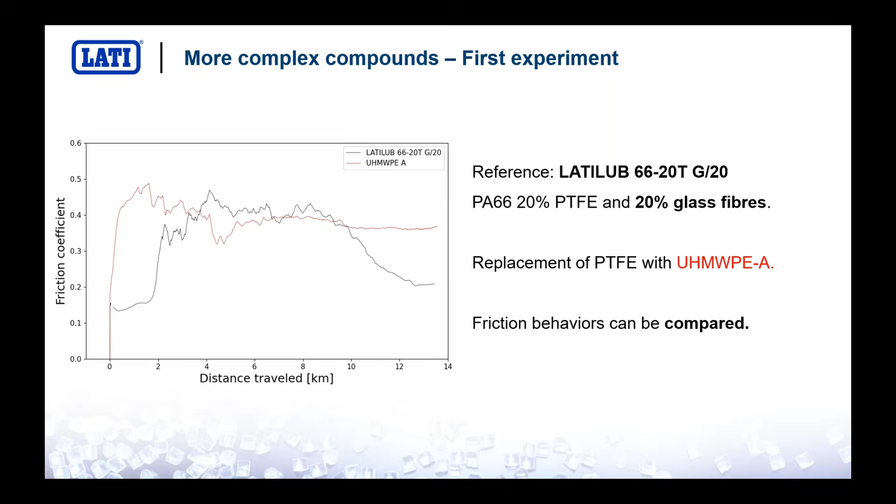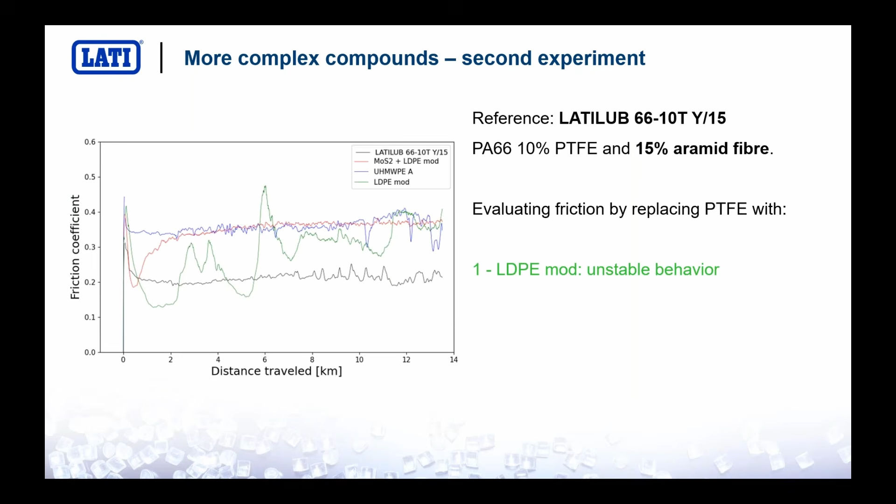We made another experiment where we tried to replace PTFE in a material I already mentioned, polyamide 66 with 10% PTFE and 15% aramid fibers. We tried different additives to replace the 10% PTFE. The black curve is the reference behavior of PTFE plus aramid fiber. Adding LDPE instead of PTFE gives a very fluctuating curve and not comparable wear resistance. Other additives we tried, like ultra-high molecular weight polyethylene type A and molybdenum disulfide plus LDPE, also gave results that were not comparable. So in this case we have not found a solution yet, and we are working on it with other possible candidates.

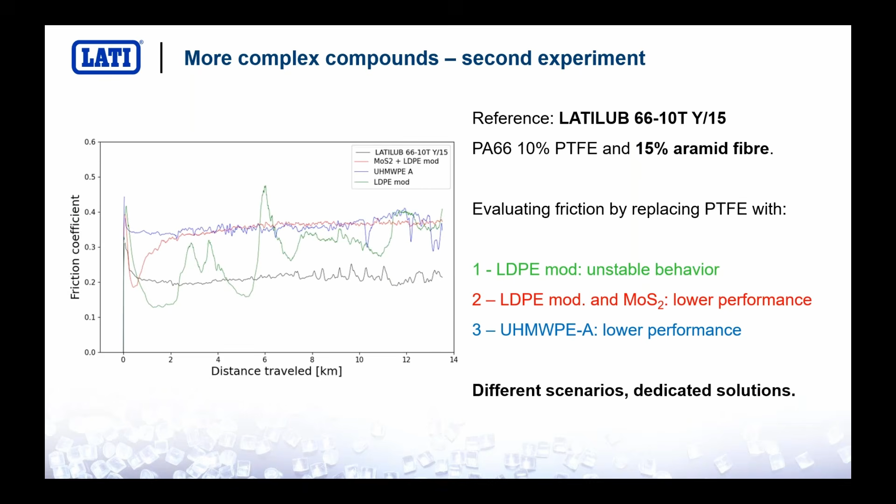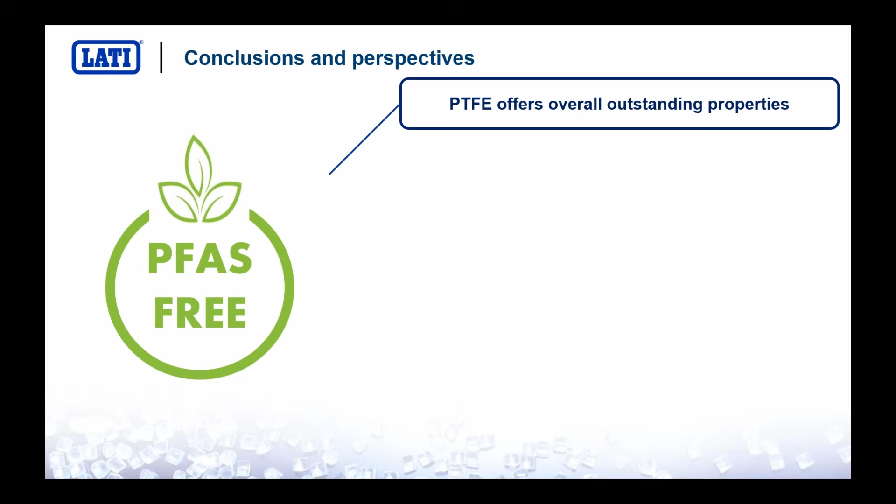So what are the conclusions of this webinar? PTFE offers outstanding properties in all conditions. Ultra-high molecular weight polyethylene is not comparable to PTFE in all conditions, but in some conditions it can work. We learned that it's possible to replace PTFE with some candidates, but often only to replace the friction behavior or only the wear behavior, not both together for some additives, though we obtain very good results for some kinds of ultra-high molecular weight polyethylene, for example type A.

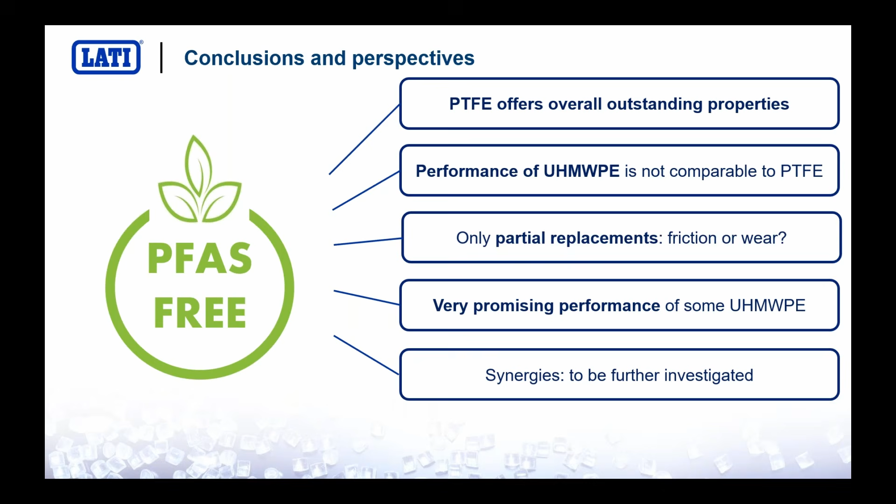There's a lot of work behind the possible synergist choice. We need to work hard to find different solutions, other synergists, and try them in different formulations, because the results of some synergic effects are really interesting. More tests are necessary, because if we change the boundary conditions, for example the load or rotational speed, the results can probably be different. That's why, although these are comparable results, tribological tests on the real molded part with real boundary conditions are strongly recommended.